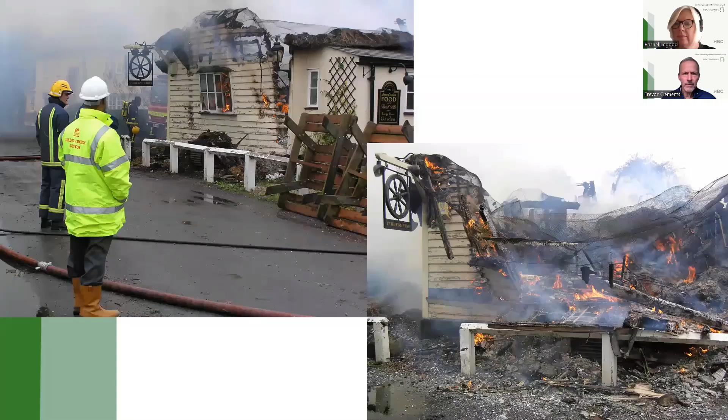Thatch fires is one we get reasonably often. In this case, it's a pub that you can't tell, but it used to have a thatched roof. And there stands the building control surveyor, hands in pockets, casually watching while a dangerous structure resolves itself by burning down to the ground. As they tend to, unfortunately, thatch fires, as any fire brigade colleagues out there will probably confirm, once they get into the thatch they're very difficult to put out once established, and often this is the result. That's another thatch fire, a grade 2 listed pair of semi-detached thatched cottages.

It was a cold autumn day. The thatch was dry, but the wood burner in the right-hand unit was burning away, and somehow, whether it was cinders or some issue with the chimney, the fire got into the thatch. Not only gutted that house, but also spread across the party wall and gutted the house next door. And the tragedy there was that it was owned by an old lady who was actually not insured. So there's often human tragedies tied up in these incidents we deal with.

Next cause, criminal damage. There's 3 striking images, 2 in East Herts. One I think was Bushey, if I remember, the one on the left, more recent. Often the criminals decide they're going to steal a telehandler and try to rip cash machines out of buildings. The problem there is that they tend not to be too surgical in their approach, and we get called in to deal with the aftermath.

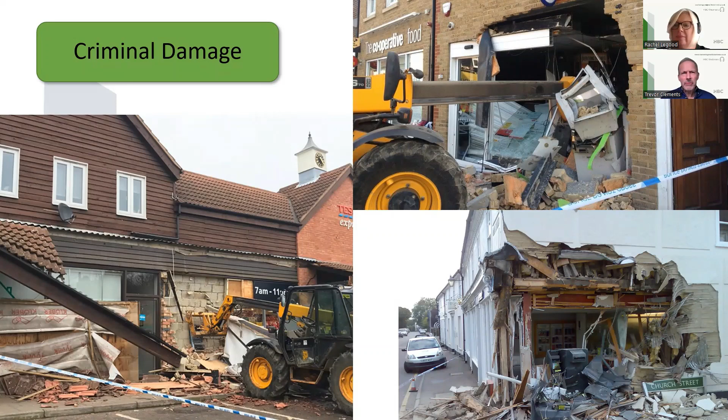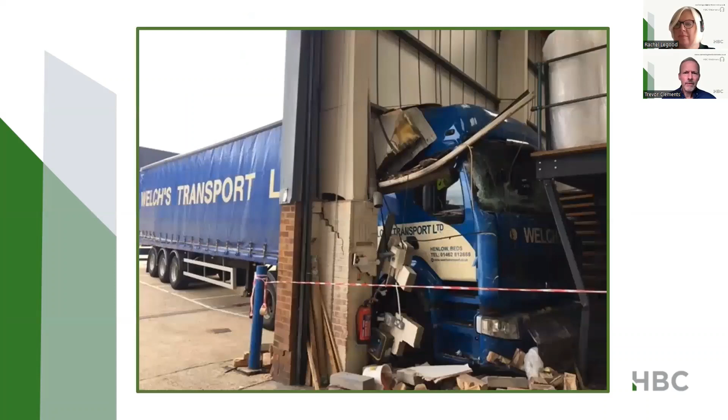Thank you, Richard Murrell. I don't know if you found time to join us today, but anyway, this is one of yours from 2018, I believe. A slightly bigger vehicle involved here. I think the driver thought he was in his Mini and misjudged the access width. We were called in to assess the damage. I can let you know the driver was sacked by the employer, but the following week he managed to get a job delivering to Unit 3 on another industrial estate. Ooh, no, only joking. Pardon my weak humour.

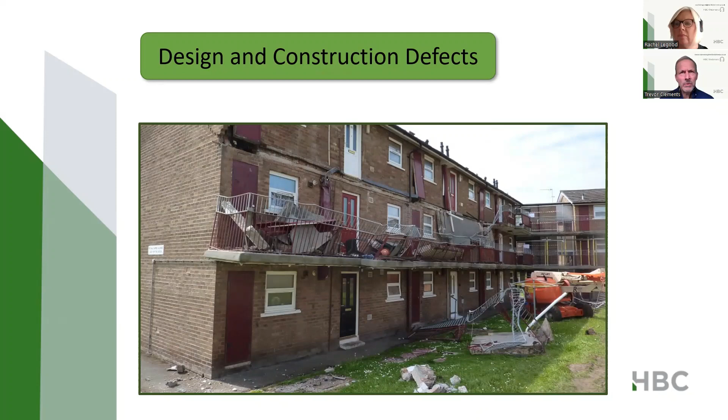I'm sure building control would have ensured the owner of the building, whether a local authority or housing association, carried out a thorough investigation to check if any other blocks were similarly affected, so remedial works could be scheduled to make sure that didn't happen on any other blocks. I don't think anybody was killed or injured - somebody might correct me in the chat if they're aware of the case - but that was more luck than anything.

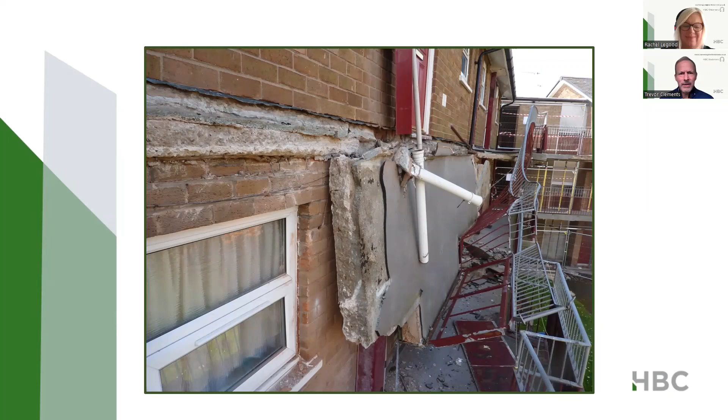More causes: extreme weather. We get a lot of variety in dangerous structures. Extreme weather can give us a flurry of cases to deal with - sometimes we get a bit swamped, especially when you get the really big storms.

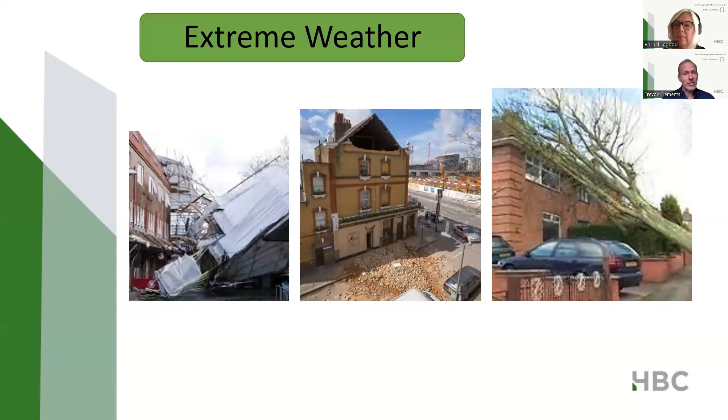Finally, a common cause is a tree blown over onto buildings - sometimes doing major damage, sometimes just superficial, and we just go and have a look and don't have to get too involved. Of course, with extreme weather, it might be flood damage. I've been involved in a few cases of lightning strike, which is tragic but interesting to see the sort of huge damage that can do to a house.

We also get a lot of old derelict buildings that owners just leave to slowly deteriorate. They're unoccupied, and it gets to the point when they present a hazard. If they aren't secure, and even though it's not likely people will go into them, if people can go into them, then it's something we need to jump on and deal with when they're reported to us.

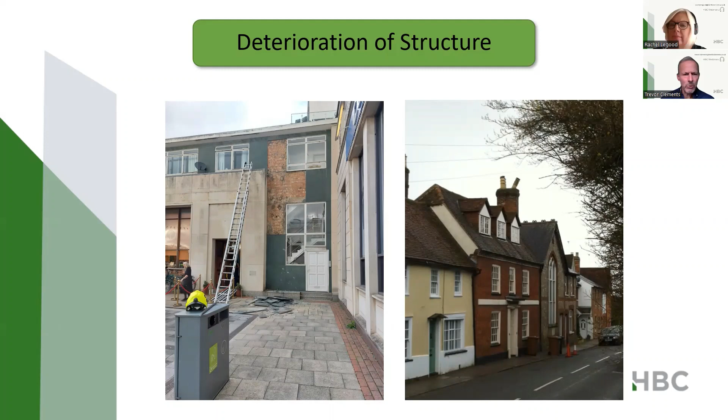And not only gas can cause explosions. What else causes explosions? Pressurized hot water vessels going off. Every so often, one of these systems, if it's been badly fitted or not maintained properly, the hot water vessel can go bang when the safety valves fail for some reason. And this results in surprisingly major damage.

In this instance, there used to be, in the left-hand picture, in that bathroom, a pressurized hot water cylinder in the corner there. Not much of that left. In fact, not much left of the bathroom. You can see that's the same building on the right. The pressure wave from that explosion not only blew the window out, but also blew a lot of the tiles up so they were standing up in the air. So it shows you the huge force that comes about and is released in those sort of incidents.

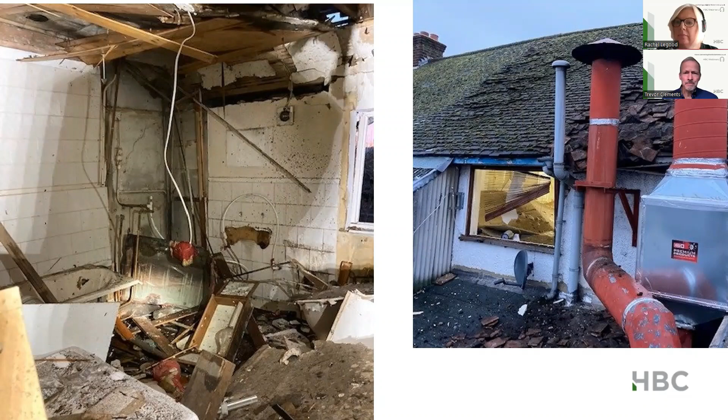Right, now a few folk, you're enjoying these, lots of striking pictures. This one's called construction calamities. I thought of a few other phrases, builders mess ups or whatever, but it wasn't really suitable for this sophisticated audience when I saw who was going to attend today. So I thought construction calamities would do.

Quite a few examples from this cause. This one, 2019, it was a rear gable wall and first floor wall. It was either inadequately propped when installing that steel beam for the knock through, or it was put in clumsily and the beam caught some propping and took it out. I can't remember, but either way it caused complete collapse of the first floor rear wall and the gable, and quite a nasty injury to the operative who got caught by some of the falling masonry below.

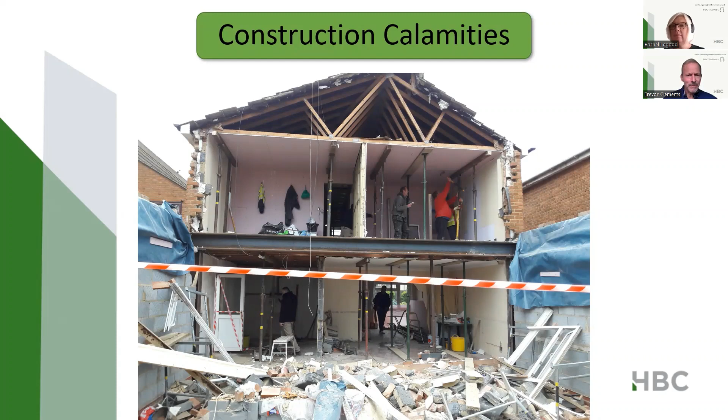You see from the image that some of those incompetent builders seem to be still on site. We've got 5 people in that picture, all walking around a dangerous building, and not a single hard hat to be seen. So there you go. They don't learn their lesson, do they? A bit of natural selection needed there.

Right, house in Bushey in 2021. What do you think? They stripped it off. There's a bungalow. They're obviously going to put a first floor on it and a new roof. Are those walls stable against wind load now that the roof has been removed?

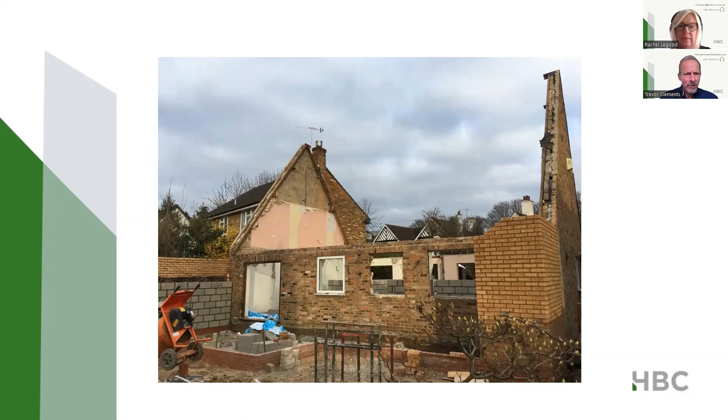Yeah, we've not quite got much lateral restraint there, have we? Well, the builder thought it was okay, and so did the architect when the next door neighbour asked them, is this okay? Because they were concerned about the risk to their property. Well, on the following windy night, they were proved wrong, and that neighbour only escaped serious injury because she was not in her bedroom when one of those unrestrained gables collapsed onto her house. So there, lesson for us all.

Yeah, these things can happen, and very unexpectedly. Let's look at the weather forecast when we're seeing walls like that hanging, just sitting there unrestrained.

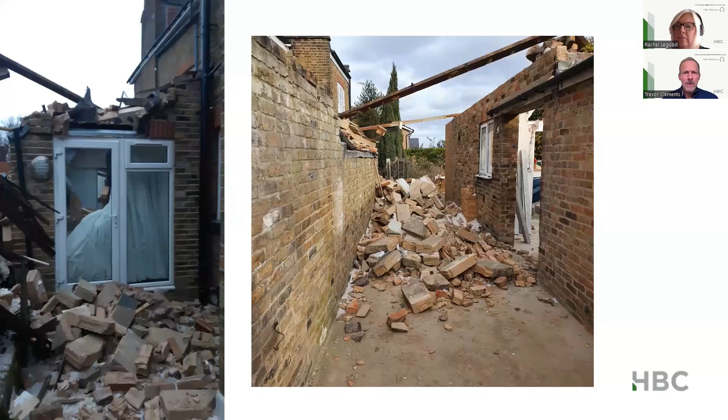Final calamity, the one from the title slide. What happened here then? We've got the major collapse of a flank wall to a semi-detached house. What's the cause? Has there been an explosion in the garage? Is it coal mining subsidence? No. In fact, it's another case of builders' incompetence.

The wall to that flank wall has been undermined by the excavation for a foundation to that neighbouring house on the right-hand side. So there's a foundation excavated, quite a deep one, all the way down the boundary line, undermining the existing foundation of that house and causing it to collapse.

So another head scratcher there on the best way to make safe. But the first thing to do, obviously, evacuate both buildings and keep people away from them while you consider how to do the longer term resolution.

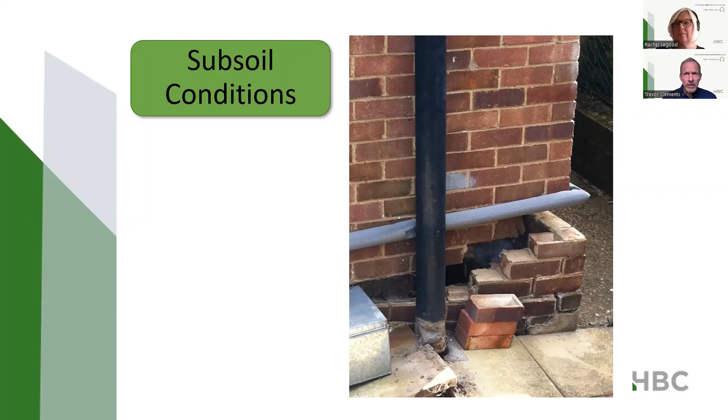Even now, I remember being really surprised at how a bomb-proof Flemish bond brickwork wall in cement mortar on a council house, how resilient it was to hang out over that large void, without any further collapse, which it did until the house was knocked down, because it did write off the house. It was too expensive to do remedial work.

It was old brick pits, I think, so there was filled ground there that got washed out. You got washout around the foundation until you had the collapse into the void, and that took out the corner pile. So those ground beams just hanging in space. Again, it's amazing, isn't it, how resilient a building can be when it's damaged. You think catastrophically, but it's just hanging there by the grace of God.

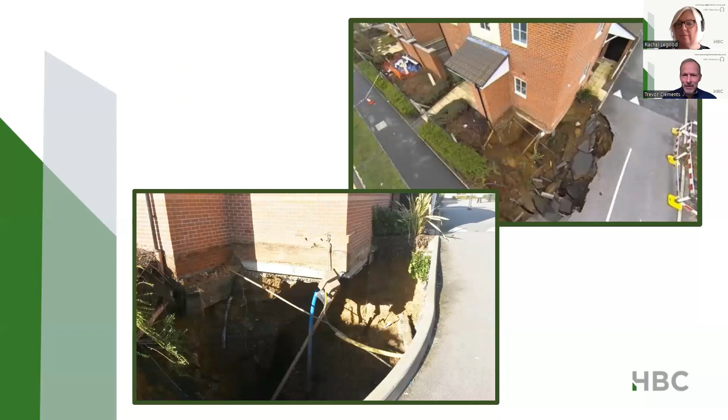Right, so there you go. Lots of startling images. So stay awake, because I've got a bit drier stuff now.

Just tell you about how we deal with notifications, how our operations team and the council switchboards will deal with them when they get notifications. These come from various sources. It might come direct from a member of the public. It might come via a local authority. It might be from the fire service or the police. And our people will log the relevant names and all the contact information for the surveyor's use.

They'll, of course, log the location of the structure. And, of course, we need an exact address. We need to get there. Maybe it's the middle of the night. And also we want to know the location of the dangerous part of the building. We don't want to have to waste time hunting around to find what we're looking for.

We need a clear description of the hazard, and then at that point we can sort of, if the word is triage the incident and decide, is it actually a dangerous structure? If we then find out actually it's a pile of rubble, well, that's not a dangerous structure and it's not something to bother our people with. Is it a hole in a field? Well, again, a hole in a field is not a structure, even if it's dangerous. And not one we would deal with unless it was next to a building and putting the building at risk of collapse.

So we look to time the report, giving it a time and a date, so it can be immediately forwarded to a surveyor or one of our out of hours team. Our performance targets, which I understand we keep to pretty rigidly, are 1 hour if it's within office hours, so we'll have somebody in attendance within the hour, or 2 hours if it's out of hours.

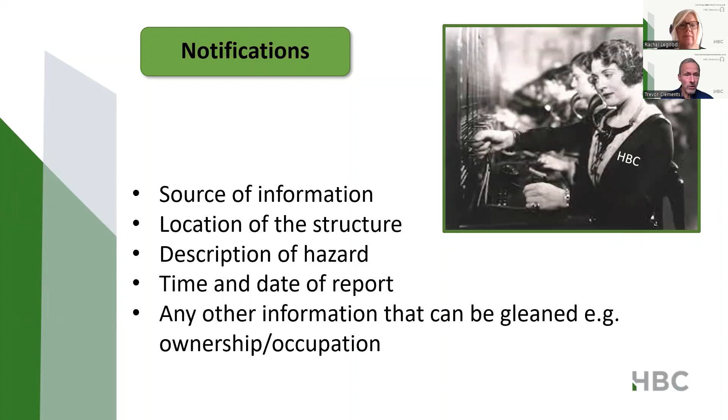Here's a list of the important considerations when undertaking that inspection of dangerous structures. A lot of it's obvious, so apologies to the colleagues out there if it feels like teaching you to suck eggs again, Trevor. Well, yes, I am, but there's no harm in putting it down in a structured way, because as you know, when we get out there the adrenaline's running, and sometimes we just need to calm down a bit and follow a sequence.

So here's the suggested sequence. First thing, if there's someone on site leading the show, maybe there's a senior fire officer there, establish the chain of command, get a briefing from those people as to what they want from you, and then get any information you can from all the people present prior to doing the inspection.

Then you can inspect the building with particular reference to the state of the structural elements. Think about load paths, think about your construction technology from the top of the building to the bottom. Is the building old and deteriorated? Is that going to exacerbate the problem, or is it otherwise in sound condition?

Of course, only inspect initially from all safe available viewpoints. And I underline all, because don't just look at it from one angle. When you look from another angle, you think something's safe, then you look from another angle and think, oh my God, I'm glad I didn't go anywhere near that. That wouldn't be the first time I'd done that. So look as much as you can to see the full extent of any damage that can possibly be seen before going any closer.

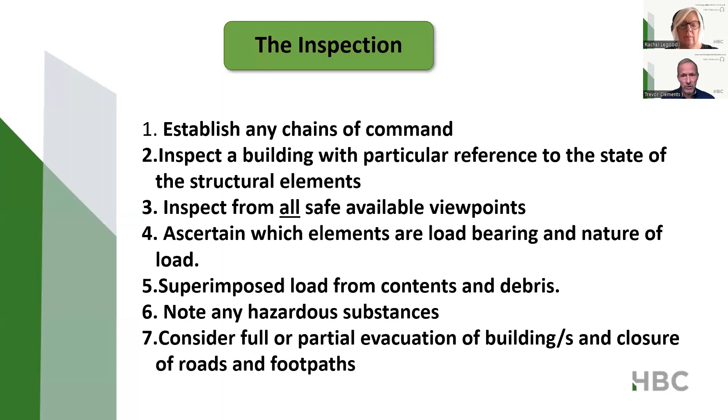Nearly finished. Where possible, don't enter the building alone. If you have to, then at least make sure that someone knows you've gone in, so they can raise an alarm if you don't come out within an agreed time, which you need to set up in advance. Even if you do that via a phone call, it means that if you're in there and in trouble, you will get helped.

There may be all sorts of broken glass and stuff in there. A torch—shown here is a hand torch, but I'd suggest a head torch is best for our sort of work. What's not illustrated is the breathing protection I mentioned, which is very important if there's any chance of asbestos being present in or on the building.

When inspecting from the outside, don't stand where you could be injured by falling masonry, falling roof coverings, wall claddings, anything like that. Yes, I know it's obvious, but in the rush and heat of the moment we sometimes forget. So stay well away, and don't stand next to subsided areas where you might fall into a hole.

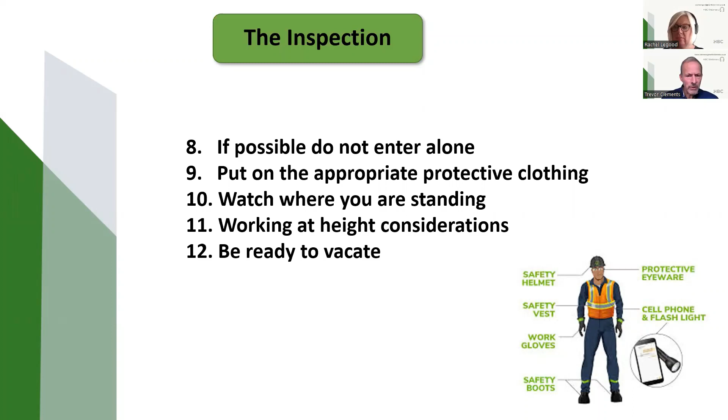If during the inspection you feel it's unsafe to carry on, because you see something that isn't good, then vacate, abandon the building, and ensure suitable precautions are taken to prevent any further entry or approach to the zone of danger. A building control surveyor should not put themselves at risk of physical injury in order to undertake their role. That's not what anybody wants you to do, including the MD. If there are hazards present and you believe entry could result in injury or damage to your health, then just don't go in.

It's better to take whatever precautions you think are necessary until specialist advice or equipment is available. So you might do some guarding to form a no entry zone, and that might just be warning tape.

I always say to surveyors I train, that's the one tool—yeah, you want your hard hat in the boot, but have a roll of warning tape in too, because if you're unexpectedly called out to an incident, it's better than nothing to keep people away and make them aware there's something going on that they need to be wary of. Then you can put more robust guarding up later on when it can be sourced.

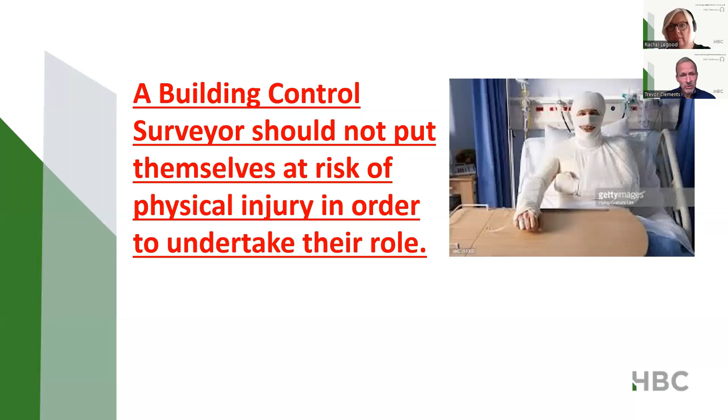Herts Fire and Rescue obtained a drone a while ago, and if that's available and they're willing to help, you can send the drone in and have a good look at the building without setting foot anywhere near it before going in. So use the tools available to you.

So we've checked the condition of the structure. Now think about other risk factors, such as location. Is it in a country field, miles from anywhere? Or is it next to a busy road or footpath used by school children? Think about the site history—have there been previous break-ins or vandalism? Are there going to be people wanting to get in, in which case let's button it up tight and make sure they can't.

Is the risk area accessible to the general public, and if so, can it be effectively secured against entry? If it can't, then maybe we need other measures to make it safe. Are the people exposed to the hazard vulnerable—elderly, with physical or mental disabilities, or children? All of this has a bearing on our decisions.

Finally, are there good levels of management control on the premises? Is it a factory or an office where there's management, and people can be kept away from the risk, and that's good enough? The general public can't get anywhere near.

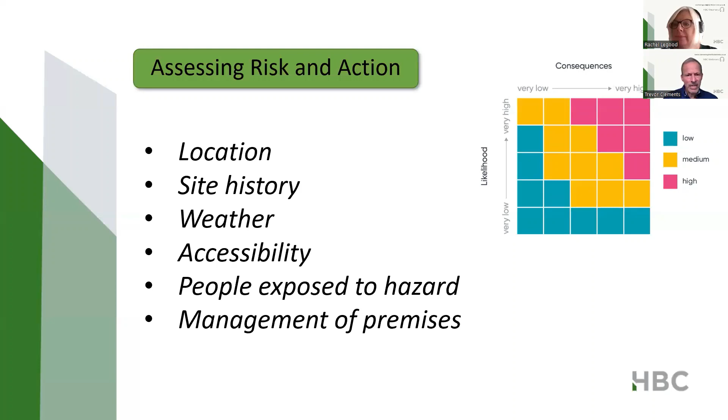So think in terms of a risk matrix. In other words, think of the likelihood of something happening and the consequences of it happening in terms of injury and that sort of thing. And then in doing that, you can make a rational decision on what action to take.

That might be a Section 77 notice under the Building Act. And that says if it appears to a local authority that a building or structure is in such a condition as to be dangerous, the local authority may apply to a magistrate's court, and the court may make an order requiring the owner to execute such work as may be necessary to obviate the danger.

So we're serving an intimation notice on the owner. Often we'll give them a time period, say 28 days, to put something right. And if the owner doesn't cooperate, we can follow that up by obtaining a magistrate's court order. And if they still won't do the work, the local authority can carry out the work and charge the cost to the owner, as long as it's a reasonable cost.

The advantage of that is that it's a magistrate backing the decision to carry out remedial work, so there's less chance of the local authority being challenged about the notice being appropriate.

But the big problem, as all of you building control people probably realise, is speed, isn't it? Once the local authority is aware there's a potential risk, they take on a liability if somebody suffers an injury while waiting for remedial work to take place. In other words, the wrong action was taken.

You should have taken more emergency action, and now somebody's injured. So these are used sparingly. If something's dangerous, it's potentially imminently dangerous. So in the vast majority of cases, far better to use a Section 78 notice, because this isn't an exact science. Nobody can predict for sure what's going to happen with that dangerous building.

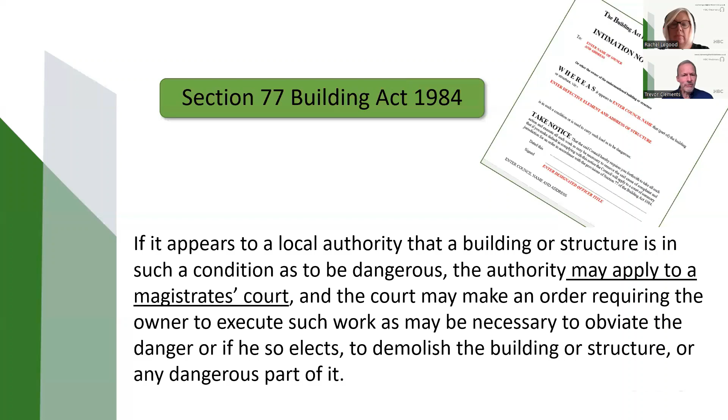Important to act immediately using these. Don't dither, because otherwise it will be challenged. If you wait 4 days before issuing one of these, then the owner, when he's sent his bill for the work you've carried out, is going to say, well, it couldn't have been that urgent - you didn't serve it till the Friday, and you inspected on the Monday. And he'd have a case, wouldn't he? So straight on it with these.

Yes, of course, we have the power to charge on reasonable costs incurred if we do carry out the work in default, and often we do, because usually owners aren't set up to jump on these dangerous structures swiftly. So we've got emergency works contractors who will come out anytime, night and day, and get it sorted.

There are rights of appeal, so we could be challenged as to whether we took the appropriate action, particularly when we're sending the bill for payment. And it could be said that you should have used Section 77 powers. So highly important to collate evidence like photos and details - you'll be very glad that you did if there is an appeal.

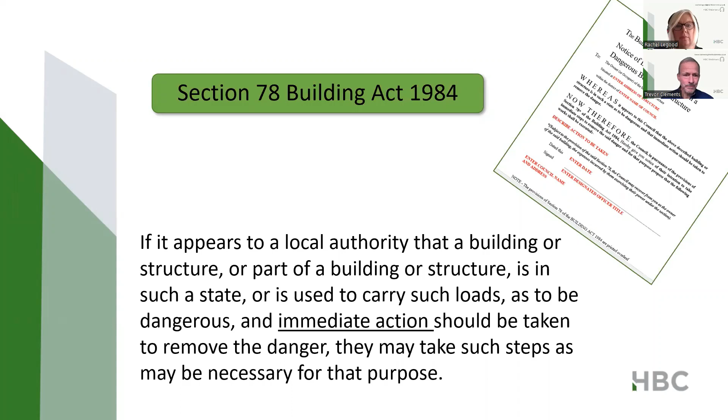Section 79: if a building is ruinous or dilapidated, the council can take action under that to have it put right. It can also be used for requiring removal of rubbish or other material.

The Highways Authority have got Section 165, which is about unfenced or inadequately fenced sources of danger, so they can take action under that legislation. And Section 167, if it's a retaining wall more than 1.37 metres high close to a street, they can take action under that.

I've never heard of the Highways Authority taking action under those sections. They usually rely on us to sort the mess out, which is far more convenient for them. And fair enough, we're not going to argue it, we're just going to jump on it and deal with it.

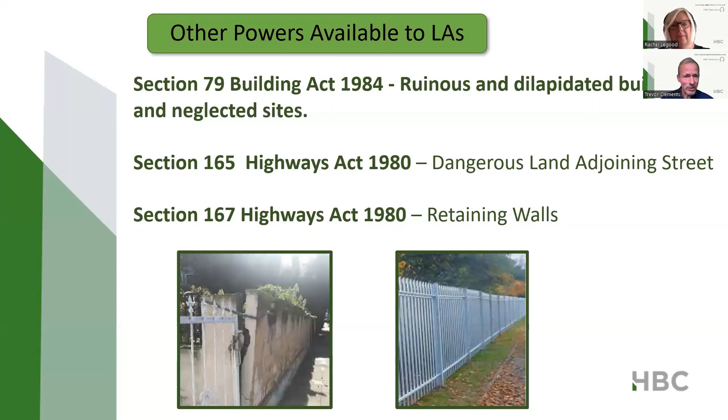A few other important considerations to have in mind when undertaking work on dangerous structures. There they are, let's go through them.

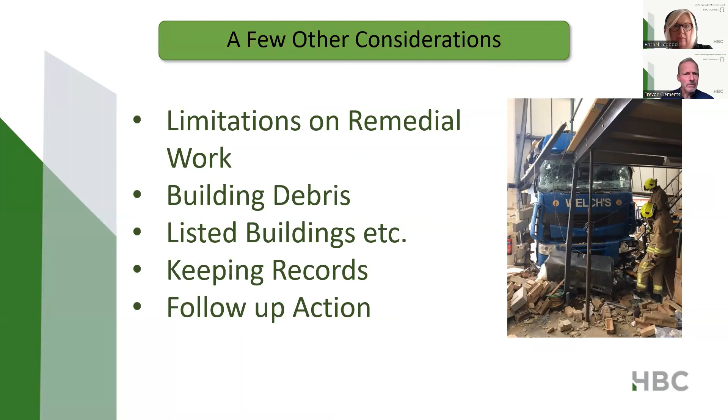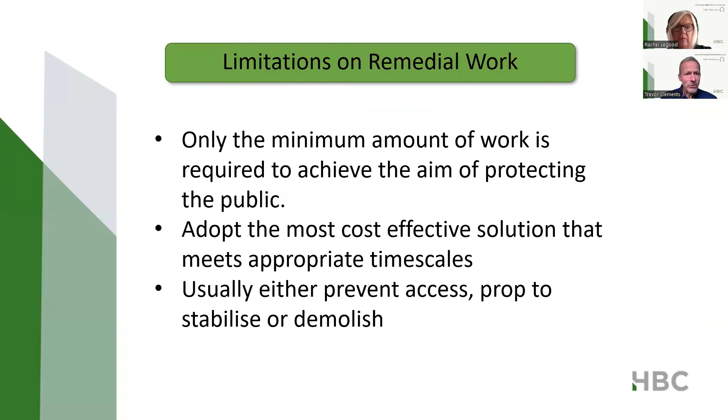Limitations on remedial work: only the minimum amount of work is required to achieve the aim of protecting the public. That's key. We must adopt the most cost-effective solution to meet the appropriate timescales, which is usually urgent. And that, as we know, is usually prevent access, prop to stabilise, or demolish.

Building debris - the owner owns his rubble. When you've knocked his wall down, you can't necessarily take that away unless it's causing a hazard or contains hazardous material. So it's for him to decide if he wants you to do that, in which case he'll have to pay. We can store the material for him somewhere if it's in the way - either on site if there's room, or if not, we can store it, but then he'll get billed for the storage costs if he's really that precious about his rubble.

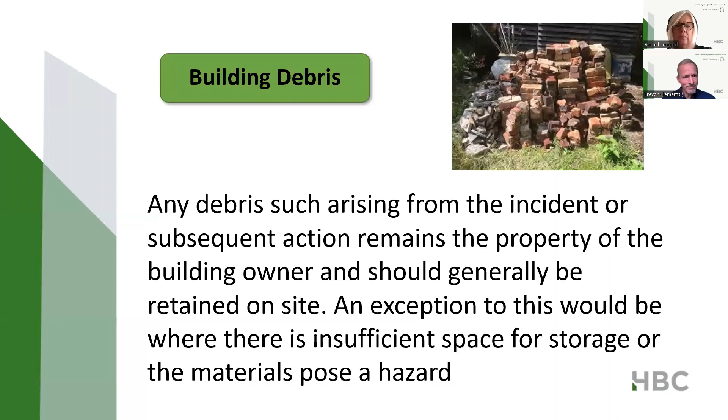And let's face it, second-hand bricks are about £2 each these days, so it might be worth being precious about your rubble.

Listed buildings: if it is a listed building, or subject to a preservation order, or in a conservation area, there is legislation in the Planning Act - the Listed Buildings and Conservation Areas Act - so a local authority can compulsorily purchase a building in need of repair. But in practice, of course, it's too urgent and we get called to take action under the Building Act because there's a risk to public safety.

That said, we should work with the conservation officer at the council so we can be as sensitive as possible whilst safety takes precedent. We don't want to damage architecturally important features unnecessarily, and we want to protect any material that might be useful for restoration. So always have that in mind and try to work with people within the timescales available.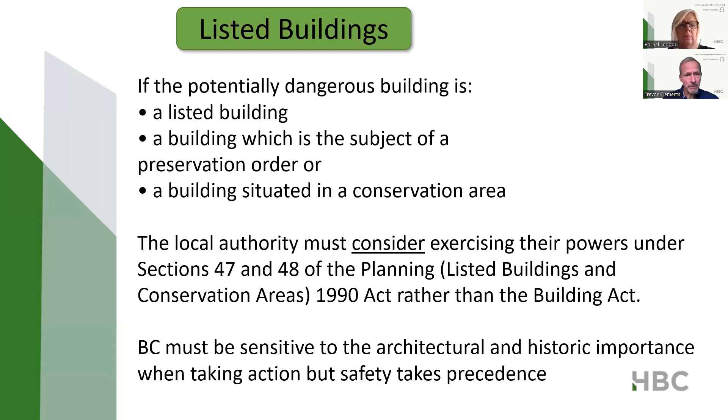Record keeping - it's so important, I've said it time and time again. Get your photos, get your evidence down, show how you've risk assessed and why you've taken the action you've taken. That's a refresher for you, and it's also for your manager when they've got to deal with the angry owner who thinks you've been unreasonable, or who puts in a legal challenge or an appeal.

Follow-up action - this is an important one people forget. Just because you've taken the danger away doesn't mean you can walk away. You put a hoarding up, that's taken away the immediate danger, but if there's still a dangerous building beyond it, we have to worry about the person who might be trespassing in there or going in there when they shouldn't be.

So I would suggest that you should always consider Section 77 non-emergency action to make the structure completely safe, and then it can be for a magistrate to decide if that's correct and issue an order to make it safe, and then the hoarding can come down and everybody's happy.

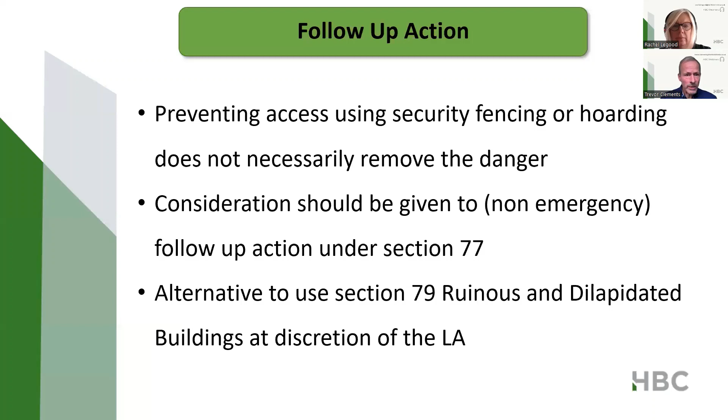A common call out for surveyors are unstable freestanding walls, so worth just a couple of slides to cover this in more detail. These are the aspects to consider when you're assessing them.

Obvious movement or rocking - is the wall live? Surface crumbling, condition of the mortar pointing - is it lime mortar? Is it cement mortar?

Cracking. How big are those cracks? Where are those cracks? What do they indicate is happening to the wall? The effect of trees, whether that's the physical effect of a tree bulging against a wall, or root action on the wall?

Verticality of the wall, of course. Where is it in terms of lean? Is it out of balance? I won't take time to talk about the middle third rule because it would take too long, and lots of people don't understand that, and feel free to contact me if you want to have a jaw about it.

Surcharge load, is there a surcharge load on one side, or an excavation that the wall wasn't designed to accommodate? Think of the height to thickness ratio of the wall. Was it badly built in the first place? Is it too thin for its height? Many walls are. There's a lot out there that were never really fit for purpose.

Think of the security of the cappings and copings. Think of what frost and water damage has done. Maybe it's salt if it's next to a road. Think of impact damage, traffic damage, and that might be vibration damage that's happened and is ongoing. And think of damage from climbing plants. Often it's a wall they've stripped the ivy off, and that was all that was holding it up, and then it becomes dangerous because the ivy is growing into the joints.

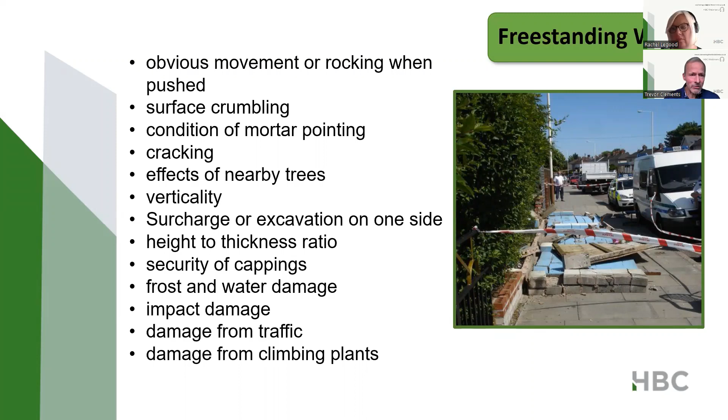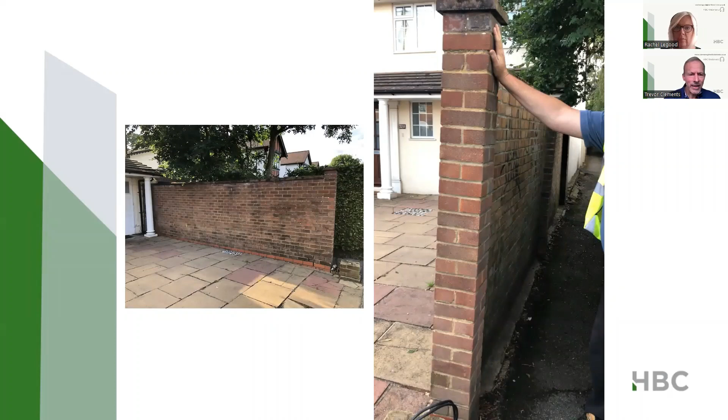Here we go. This is wobbly wall syndrome. What do we mean by a live wall? Well, that's what we mean by a live wall. We were called upon to deal with that one. It was next to a path that was regularly used by school children. In fact, that afternoon there was going to be a few dozen school children go through there. So we jumped on it and got that to the ground and methodically took that down in a safe way.

And he was wearing a hat when it happened, I assure you, because he told me so.

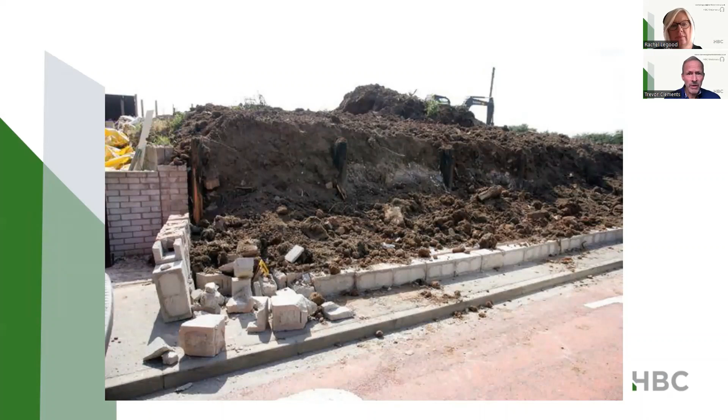It does make you wonder how many tragedies are prevented by building control teams around the country acting swiftly to make safe dangerous walls like this, doesn't it? We see the headlines when it happens, but we don't know how many are prevented. This one wasn't prevented. It wasn't dealt with in time and resulted in a fatality. Not in Hertfordshire, but too much surcharge. It wasn't designed to take, and it collapsed, and someone got caught underneath it. An awful circumstance. Nearly there now.

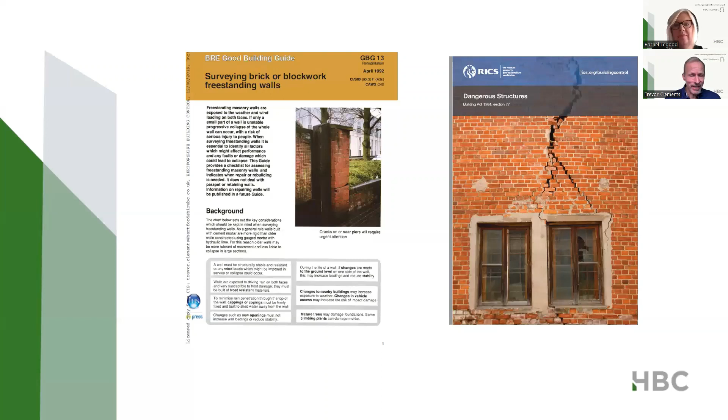If you want some extra bedtime reading, and I'm sure the majority of you do, there's a couple of quite old guidance documents there: BRE Good Building Guide 13, and RICS produced one on dangerous structures guidance. But it's not something you can learn from a book, really, is it? And as most of you know, involved in it, the best way is to deal with them, go out with experienced people, and build up your knowledge. But yeah, not to panic, and to deal with them methodically and think of the guidance that's been in the preceding slides.

And finally, to conclude, I've got a short video. Some of you might have seen it, but it's what you might call a self-rectifying dangerous structure. So sometimes, yes, you can remove a chimney breast without supporting the stack. We talked about bomb-proof flattened bricks, didn't we, earlier? Well, yeah, sometimes you do that, and that'll stay there for years. But it's not a gamble I'd recommend. So let's have a look what happens here. That one looks a bit dangerous, doesn't it?

Yeah, and it's still dangerous. Still dangerous. Go and get the tools. Go watch the tools, Henry. That's it. Go and watch the tools. Still dangerous. Still dangerous. Oh. There you go. Sorted.

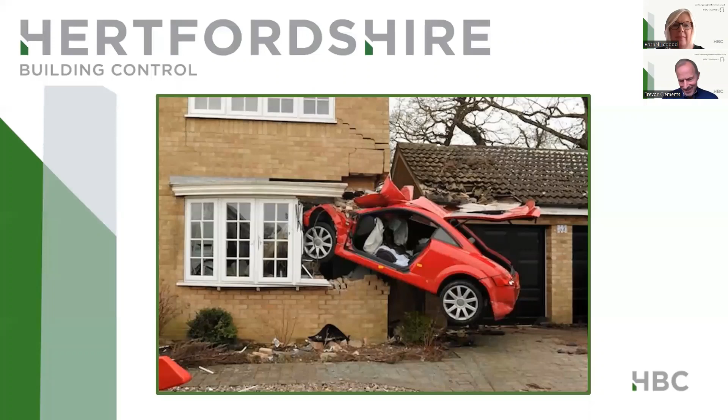So that's going to save some paperwork, isn't it? But it's a striking video to conclude, and I'm sure those of you who haven't seen that one before has found that enjoyable. Rachel, I'm slightly over. I'll take a big slap on the wrist and shut up now.

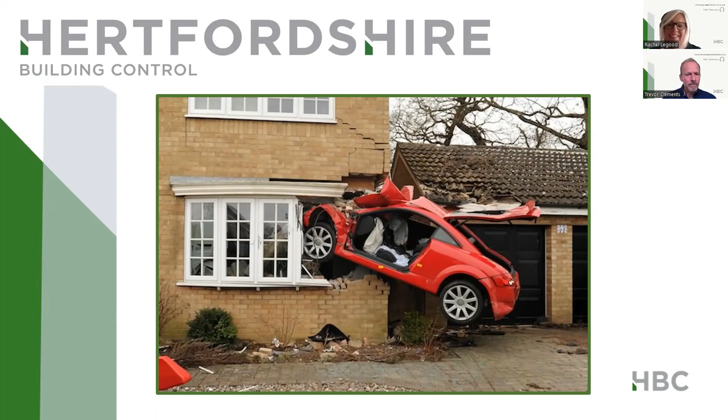Someone says, who do you call at 3 a.m. in the morning, apart from Ghostbusters? Who do you call? I'll just go back on that last one. Obviously, you only issue 78 if it's valid, and if you're taking 78 action. Otherwise, you wouldn't. But so long as that's clear. So, who do you call, Ghostbusters, at 3 a.m. in the morning? Who do you call?

You call your local authority emergency number, which is a 24/7 number, and they call our happy surveyor who's deep asleep, dreaming about something wonderful, and they get out to the incident within 2 hours if it's a valid dangerous structure call out. So go to your local authority depending on where the incident is, and they'll all have an emergency number.

Just a local question: do we have the latest on the sinkhole in Panshanger? I certainly haven't. As I say, I'm out of touch, so I'm not necessarily knowing about every incident.

So Panshanger is prone to them because of the chalk geology there. In fact, the foundations that are built there all have to be specially designed to accommodate the risk. So there are a lot of reinforced concrete foundation extensions going up in Panshanger.

Any colleagues out there who've been involved in that, who are watching, who can put that in the chat, let us know. Yeah, keep me up to speed, and I don't look like an idiot in front of a 200-person audience. Yeah, that's great.